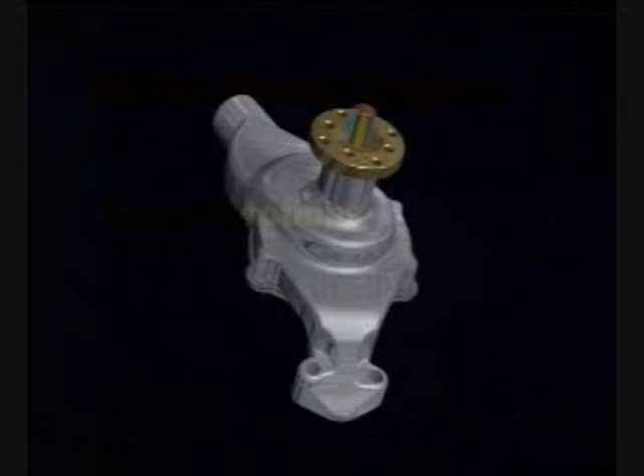Most water pumps have 5 basic components. The housing is the outer shell that encases the pump. It is typically made of cast iron or aluminum materials, although a number of modern engines use stamped steel housings.

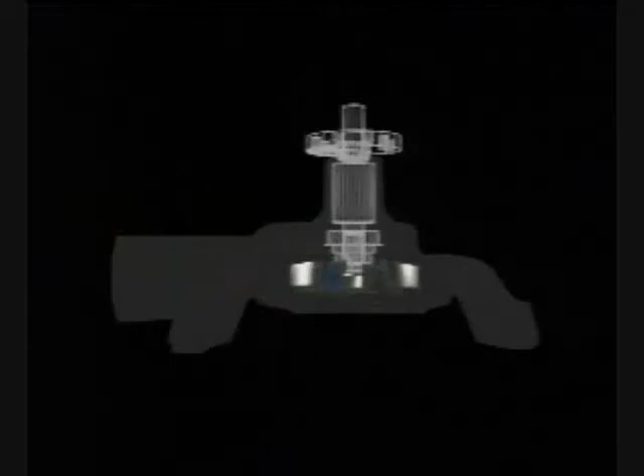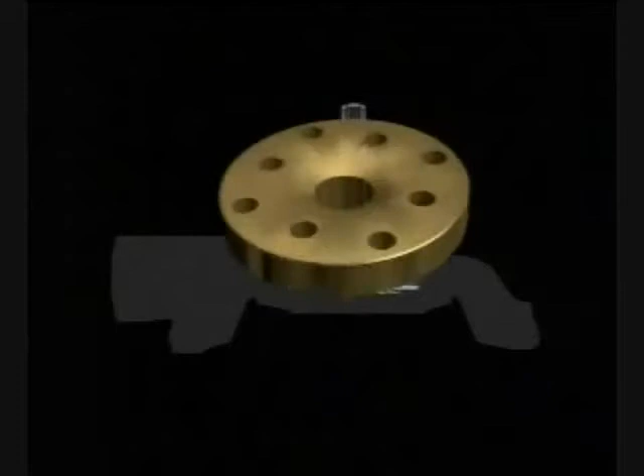The impeller spins and distributes coolant throughout the cooling system. The bearing assembly is the mechanical support for continuous rotation of the impeller. Attached to the bearing assembly is the hub, which is the connecting source of power for impeller rotation. Finally, the seal protects the bearing assembly from coolant and contaminants.

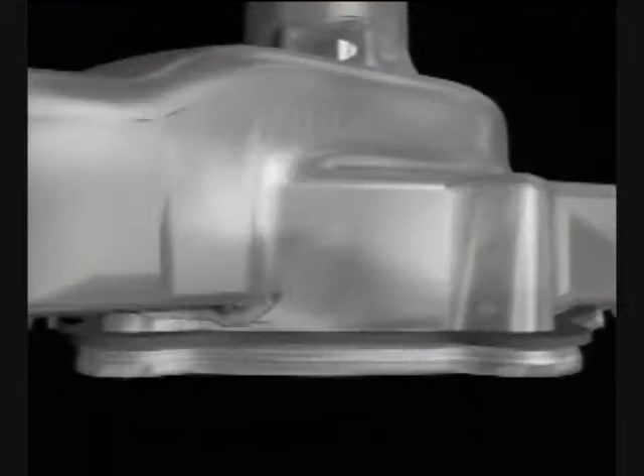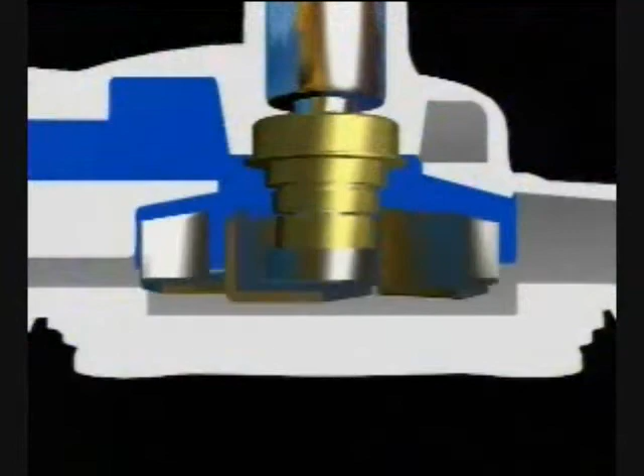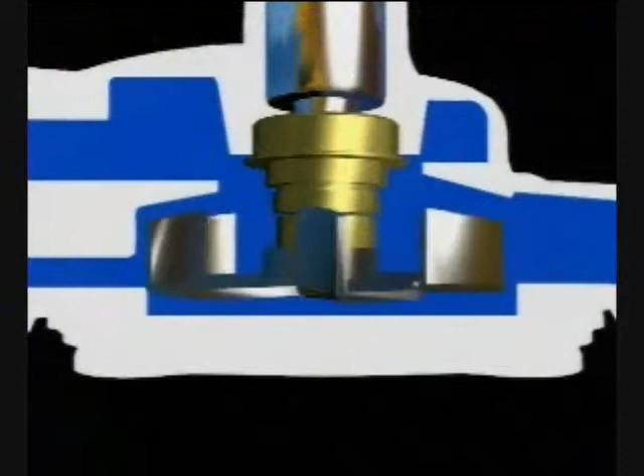Varying by model, the cooling fluid enters the pump housing through the radiator outlet. Centrifugal force from the rotating impeller inside the pump acts as a vacuum and pulls the fluid towards the center of the pump. The fluid fills the shallow cavity where the impeller rotates in either standard or reverse direction, depending upon the model. The impeller disperses the fluid into surrounding outlets that lead to various subsystems within the cooling system.

Over the years, there have been amazing developments that have enhanced the performance of the primary water pump components. The average pump is designed to function for more than 50,000 miles. However, there are various causes for premature failure.

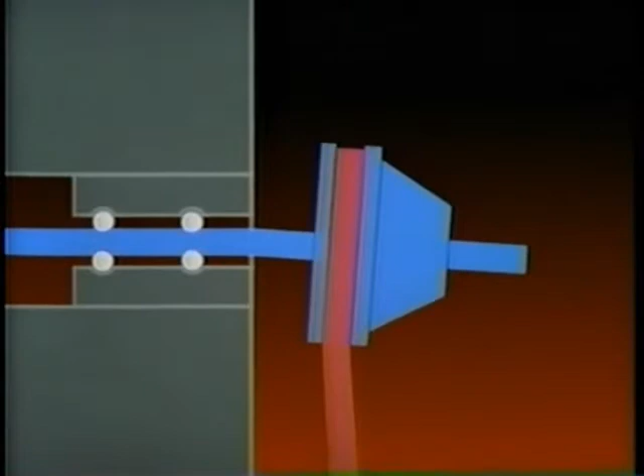The number one reason for premature failure is related to leakage of the water pump seal. Even when operating well under its design load, the pump bearing assembly is vulnerable to unintended stresses. A seemingly harmless, over-tightened fan belt can pull the shaft out of line, so the bearing eventually goes bad.

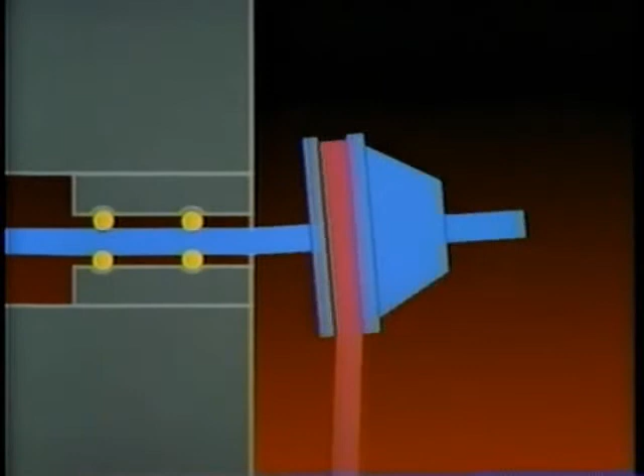An out-of-balance fan or fan clutch will stress the bearing until it gives out. A shaft bent even slightly out of line throws an unbalanced load on the bearing, causing premature failure.

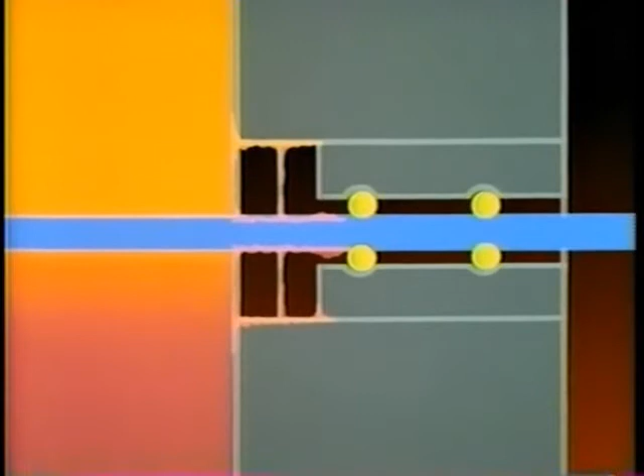Abrasive particles in the coolant can wear away the seal or embed themselves in a sealing surface, causing a leak. If coolant seeps into the sealed bearing, it dilutes the lubricant and leads ultimately to bearing failure.

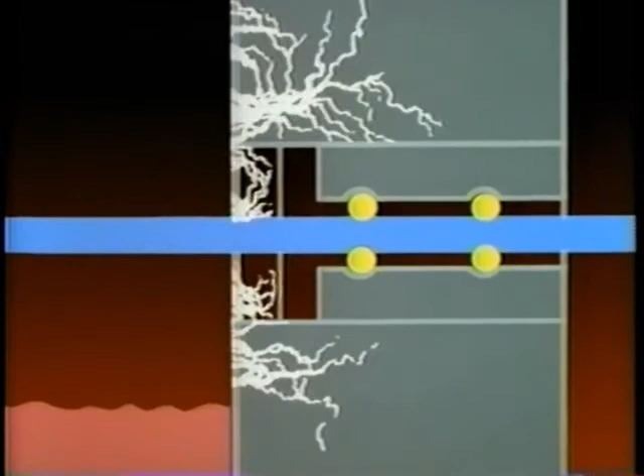Low coolant level or poor circulation can run the pump dry. Then the pump seal gets so overheated it cracks like a hot cup in cold water.

Preventive maintenance can protect the cooling system and water pump, avoid breakdowns, and save on costly repairs.

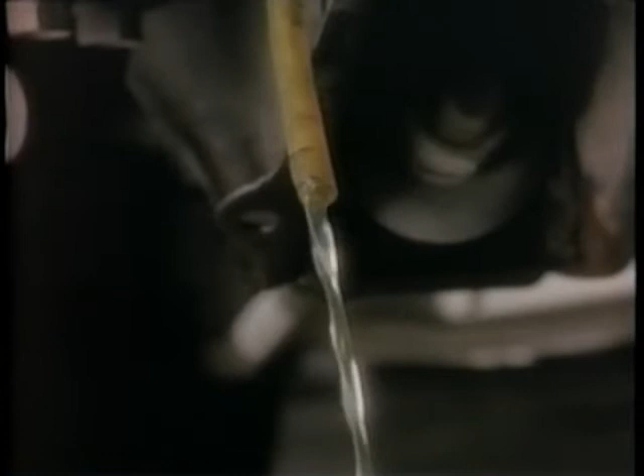Flush the system anytime the coolant looks contaminated. Always flush before installing a new water pump. Reverse flush only if the system's badly clogged. Now, leave the radiator drain open to prevent damage.

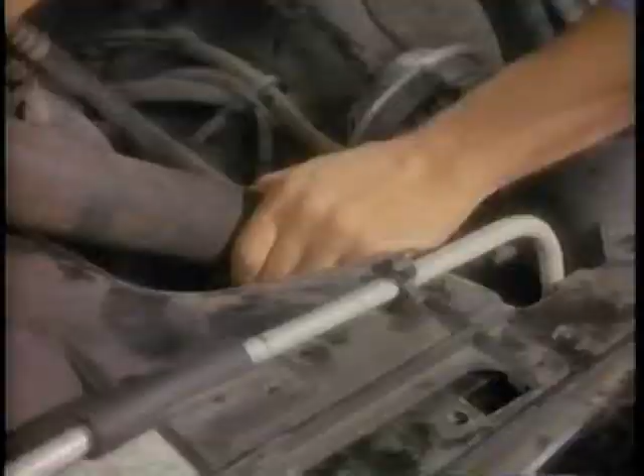Feel the hoses. Replace the hardened ones. They're likely to fail at any time. Swollen hoses like this one are trouble waiting to happen. Don't take chances. Replace them.

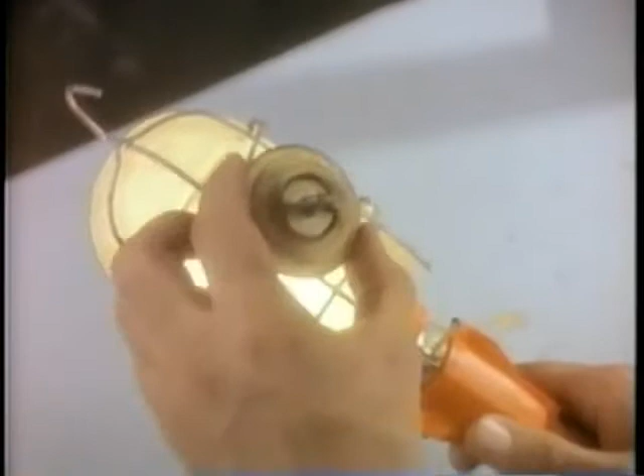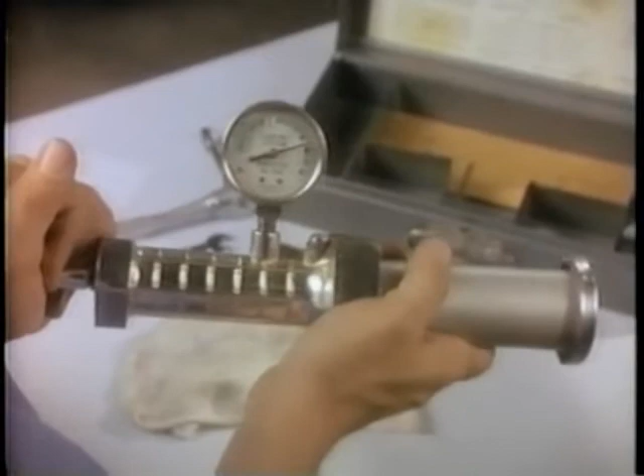Inspect the thermostat at room temperature. If you can see light all around the edges, replace it. Check the radiator cap with a pressure tester and replace the cap if it won't hold the rated pressure. Inspect the water outlet for leakage and install a new gasket if necessary.

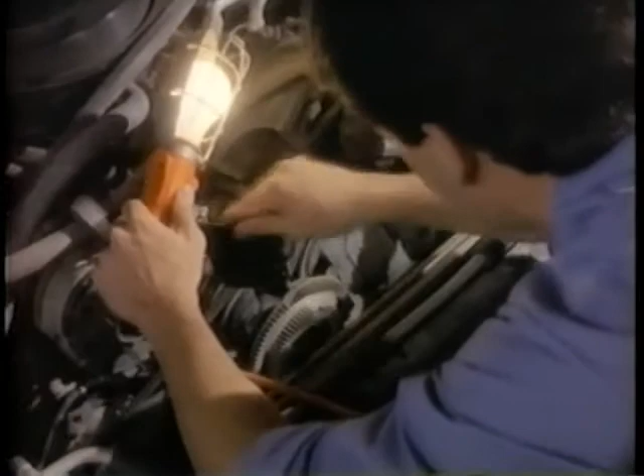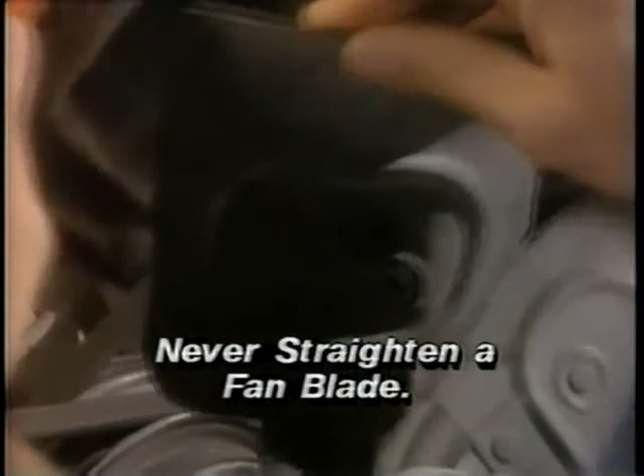Inspect the cooling fan. First, look for cracks, bent blades, loose rivets. Bending a blade causes metal fatigue that usually results in breakage. Never straighten a fan blade.

Replace the fan. Check the fan for straightness by placing it on a flat, true surface. If any blade is more than 3/32 high, replace the fan.

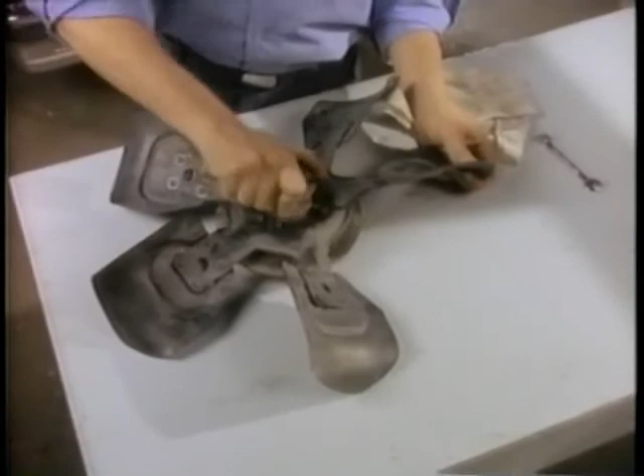Inspect the fan clutch. A fan clutch bearing failure commonly results in a water pump bearing failure. Any fan clutch with more than 30,000 miles is suspect. Look for oily streaks on the fan clutch housing.

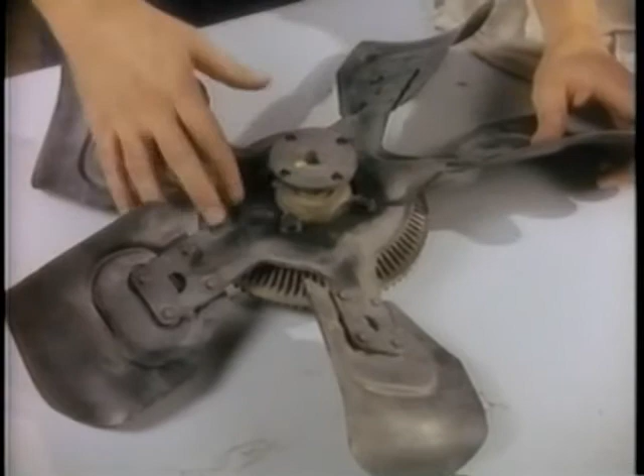Oily streaks are easy to see because they attract dirt. It's probably a silicone fluid leak from the fan clutch. Replace the worn unit. With the engine off, hold the fan blades like this and try moving the fan from side to side. Tip movement more than 1/4 of an inch either way indicates clutch bearing wear.

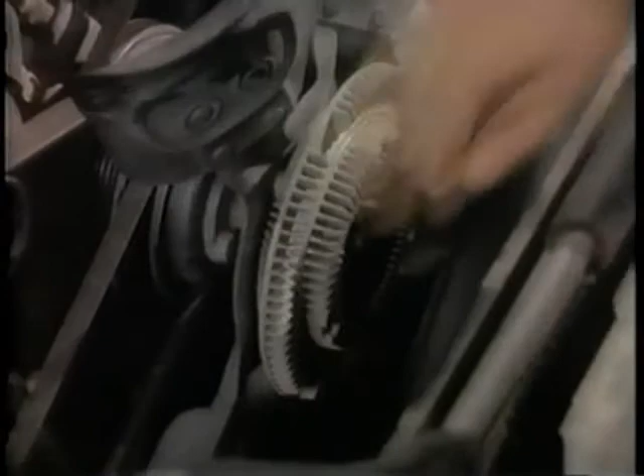Replace. With the engine at operating temperature and turned off, spin the fan with one finger. If the fan rotates more than twice, the clutch is freewheeling and should be replaced.